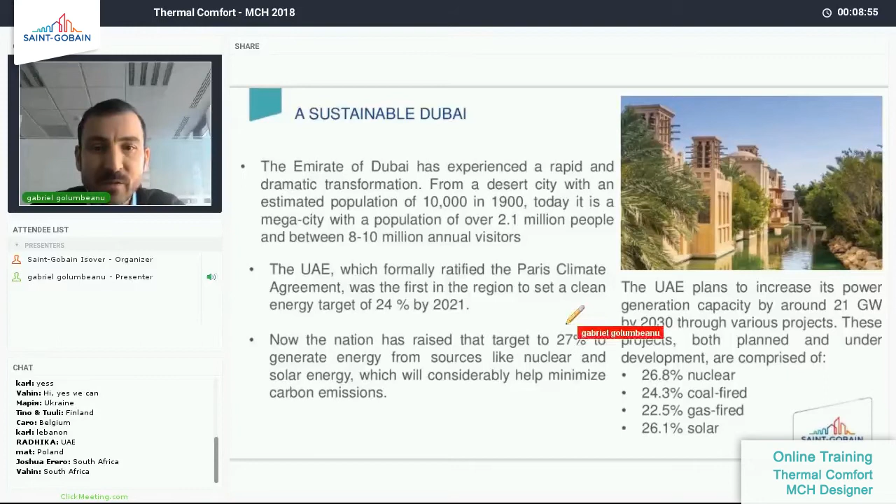But just to know, first of all, that Dubai has ratified the Paris Climate agreement, which set an energy target of about 24% by 2021, and they even went one step further, saying we should be about 27% clean energy, in order to decrease the CO2 carbon emissions.

You can see here they are taking into account not only solar energy but also nuclear, and by 2030 the idea would be to have something like 1/4 of energy produced by nuclear, 1/4 coal, 1/4 gas, and 1/4 solar. This is one idea of how Dubai is looking at sustainability from a resources point of view today.

Then some information about energy efficiency. Dubai municipality is in the loop - it is within the council dealing with all kinds of projects around energy and water, and their aim is to reduce water consumption by as much as 40% by 2030.

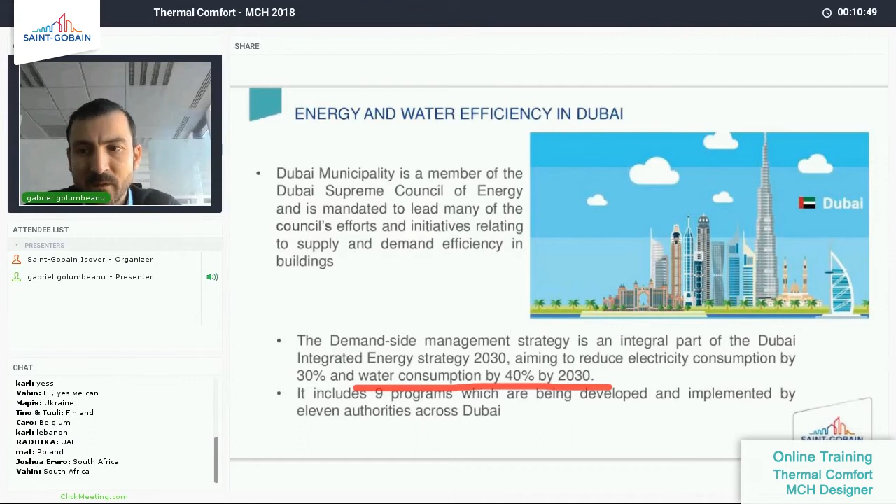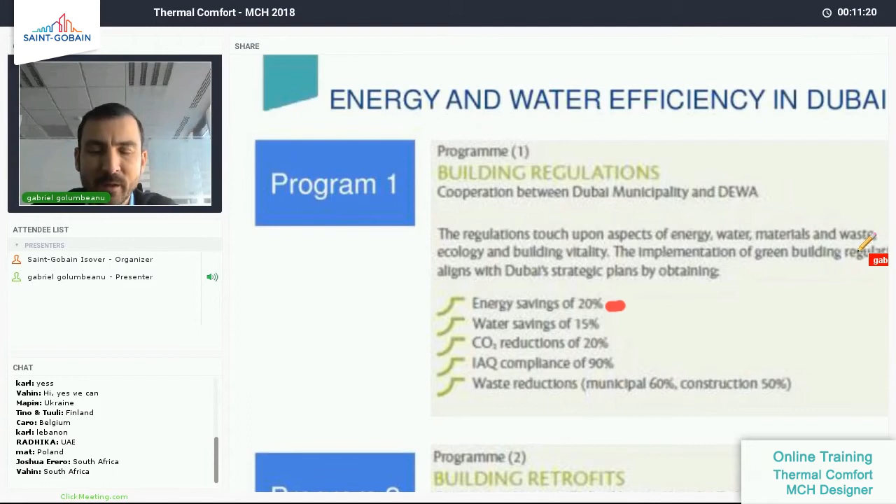As you can see, there are about 9 programs today working in Dubai. You have here an idea about the programs - I will just zoom this one to give you an idea. For example, the first program has energy savings of 20%, covering water, CO2, indoor air quality compliance, waste reduction, and so on.

Then there is a program for retrofitting. These programs give you an idea about how today, locally, the issue of sustainability is seen by the local authorities.

Then you will also see this green building regulation and specification. The green building approach has been regulated in Dubai since 2011, so there is a document on that one. I will share it with you briefly, and then you will find it on the website of the student contest, so that you can download it.

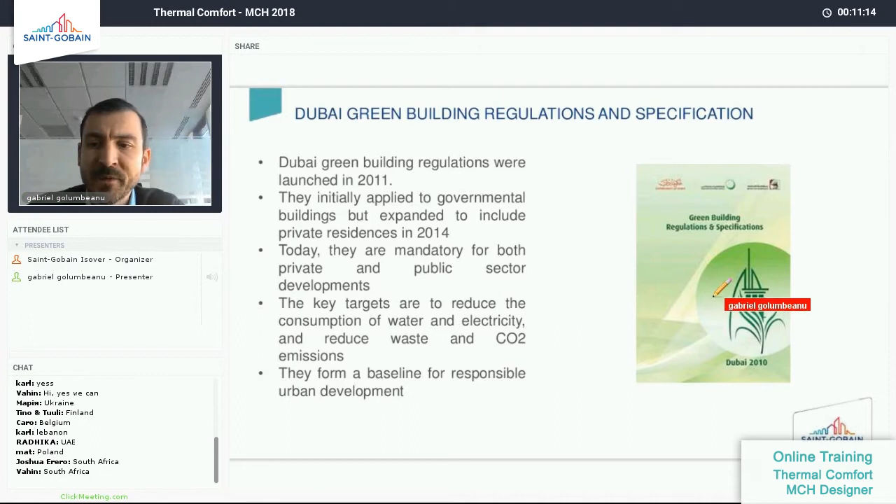And last but not least, there is a rating system which was launched back in 2016. You have platinum, gold, silver, and bronze, and the point is that if you do not receive this minimum bronze rating, you will not receive the permission from Dubai municipality.

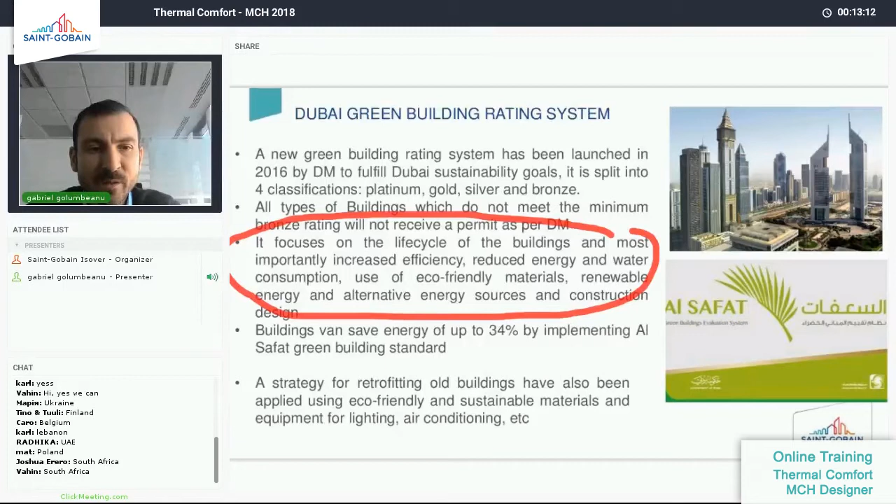So I encourage you to take a look at it. It is focusing on the life cycle of the building - about increasing energy efficiency, increasing the efficiency of using energy, increasing the efficiency of using water. There are a lot of key statements there that I encourage you to take a look at.

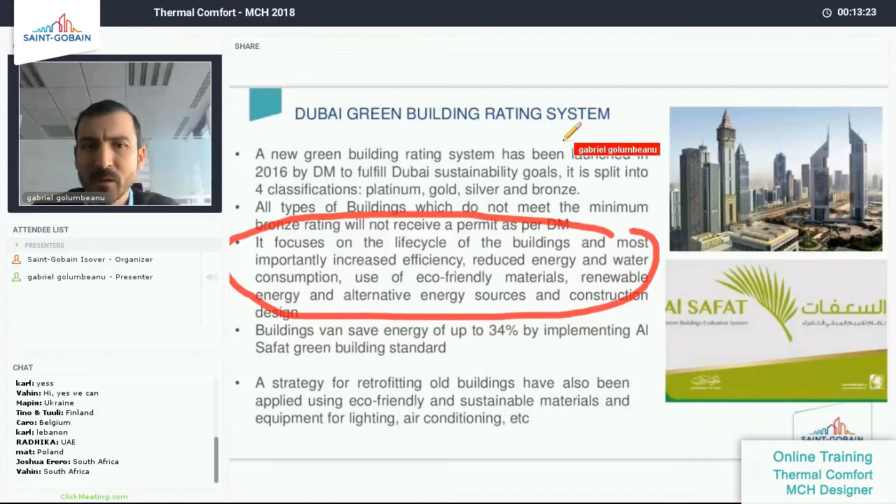So to give you an idea of how this is looking, I'll just close this one and open this one very briefly again. So you have here a document which is basically showing you the definitions, what it's linked with the planning, and what is the link with the different dimensions of comfort that you can find here.

Then you have a few other sections - efficiency of resources when we speak about energy, efficiency of resources when we speak about water, and last but not least, material and waste. So within your project, make sure that you look at it and have some comments around it.

For those of you that already heard it during the previous presentation, I will repeat myself; for those that don't know it yet - don't assume, neither for the local stage nor the international stage, that the judges will know everything there is to know about your project if you do not explain it, if you do not show it, if you don't put it somewhere.

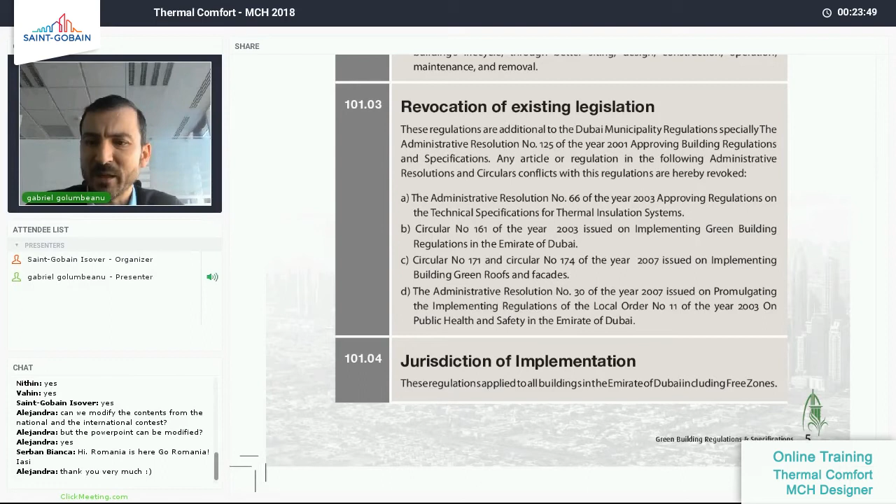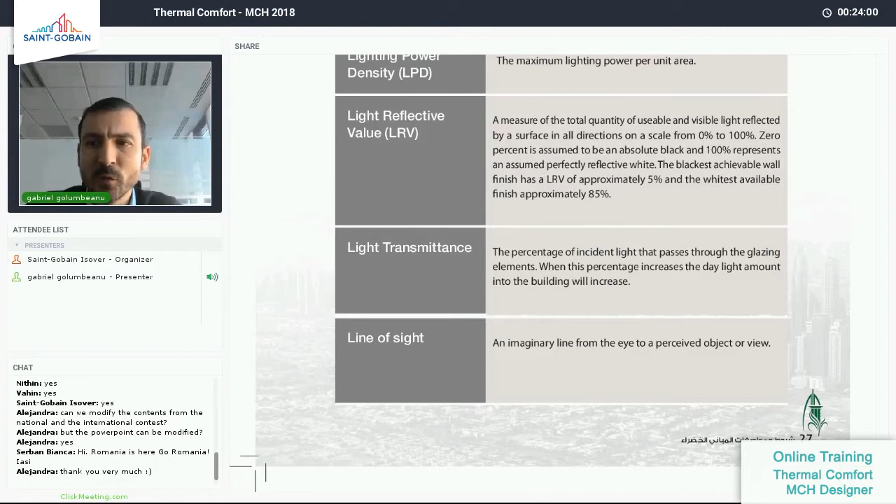Going a little further with this, I'm not going to go too much into details, but you can see here, it's 77 pages of all kinds of data and information that is good to take a look at.

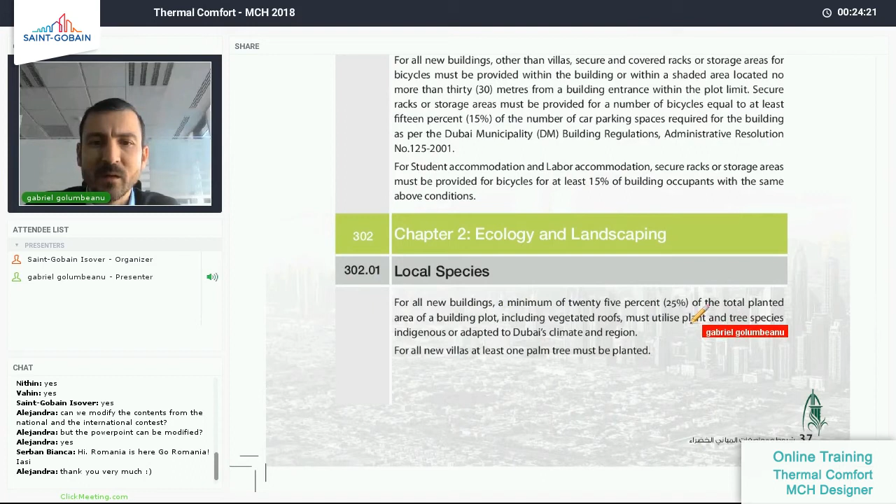I'll try to go deeper within the presentation. This should be the part with the planning. For example, for new buildings, a minimum of 25% of the total planted area of the building plot, including vegetal roof, must utilize plants and tree species indigenous or adapted to Dubai climate and region. This is actually a common sense rule. You're not going to take species which are not adapted to Dubai, take them from Europe, plant them in Dubai, and say this plant needs constant 24/7 monitoring and water supply. It doesn't have to even be mentioned, but it is, because you have to adapt to local legislation.

Then you have a lot of things about light and colors. For example, for all new buildings, at least 75% of the area of external painted walls must have a minimum light reflective value of 45%. Basically it's saying you need your building painted in light colors. If you come to Dubai with a building and paint it black, one of the first questions the judges will ask is how about the overheating effect due to color?

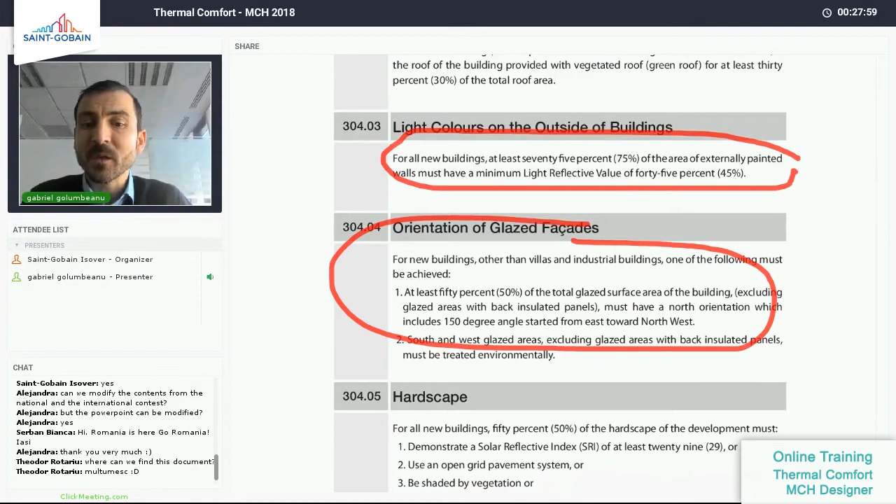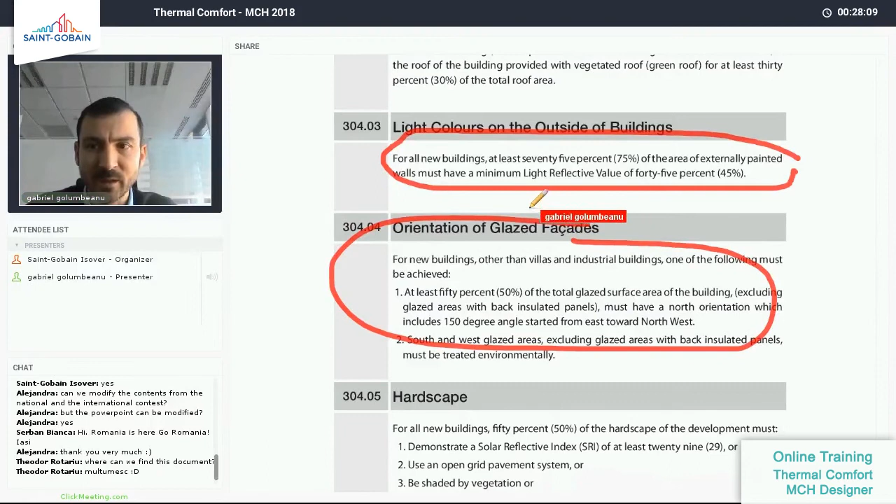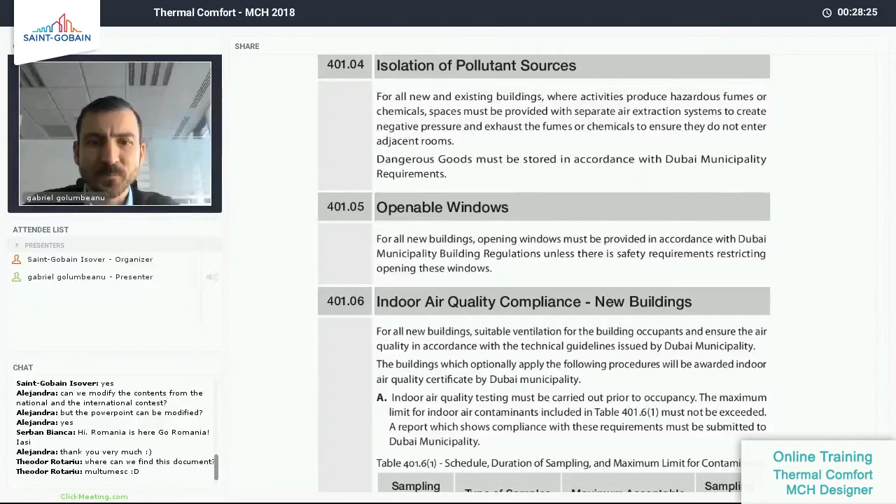Nothing special, but just maybe in a more point-by-point approach. This will be uploaded on the website. The training is finished, and if you are going to respect the multi-comfort criteria, then these criteria of green building will also be achieved.

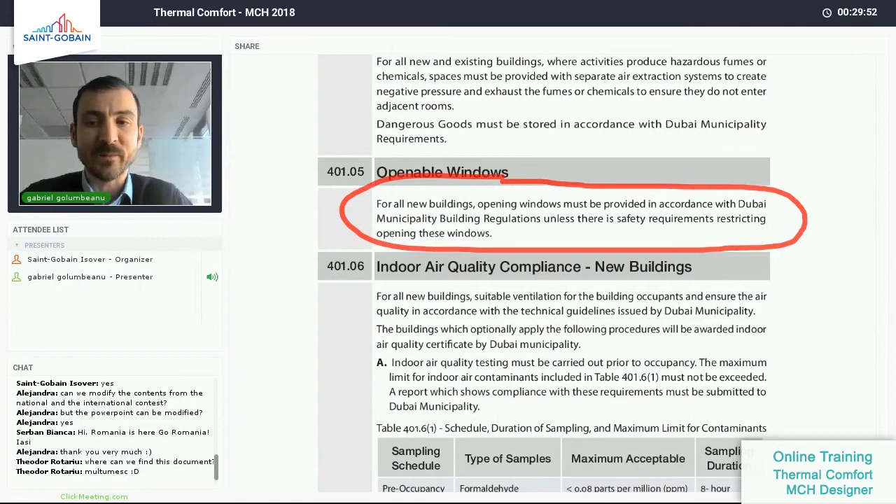Another example: openable windows. This is in connection with air quality. If you provide and show that you are actively providing fresh air, then it's already okay. But if you provide openable windows and say ventilation is going to be done only through openable windows, then the judges will ask what you are going to do during periods when the outside temperature is above 35 degrees. You have to select: either I breathe, so I open the window, and I get 35 degrees inside, or I choose not to breathe just to stay cool. So you need to think about these two and take them into account.

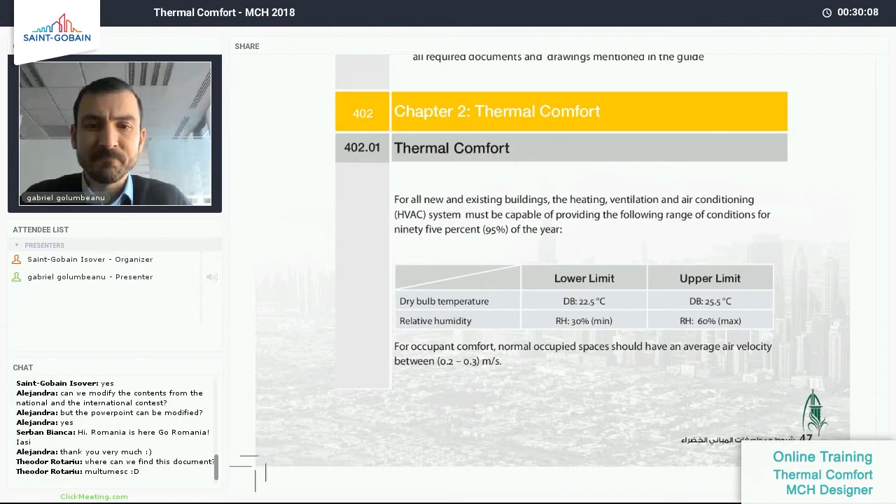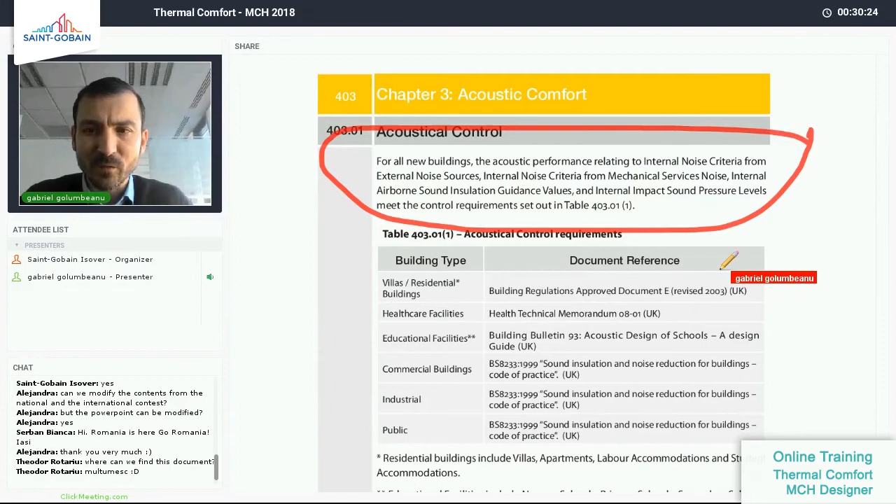I think that would be more or less within the limit. I don't know what more I could tell you about this. We already have a full presentation on acoustics that you have to fulfill with the multi-comfort criteria. You should feel that it's not going to be an issue to reach the levels we are speaking about.

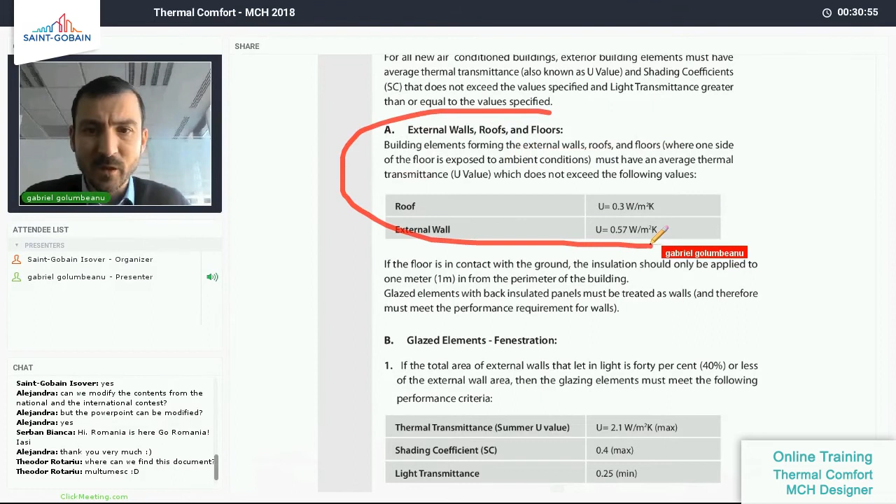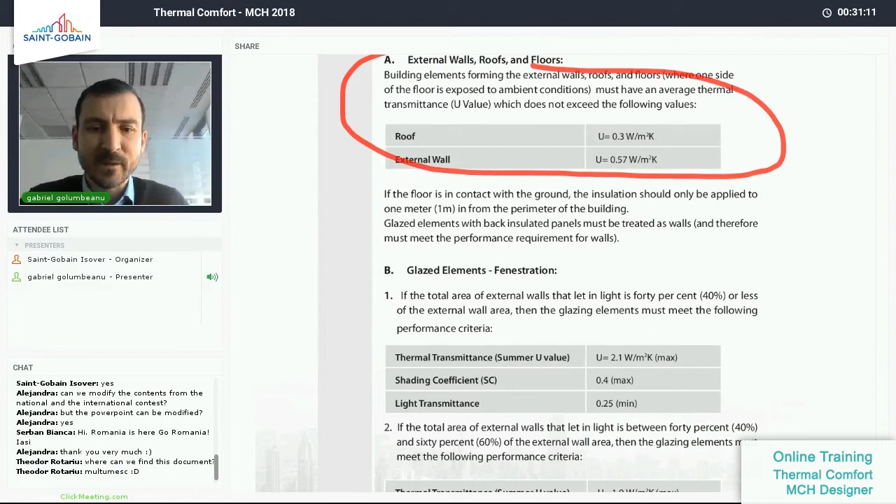So have a look at it and you will understand it better. Just to show you, because I mentioned that if you respect the multi-comfort principles and approach, you will already be better than what is asked here. You can see the roof requirement is 0.3; our recommendation is to go at 0.15, so better. The external walls requirement is 0.6; we recommend you go far below that. All of these things will be respected by you if you approach it within the multi-comfort view.

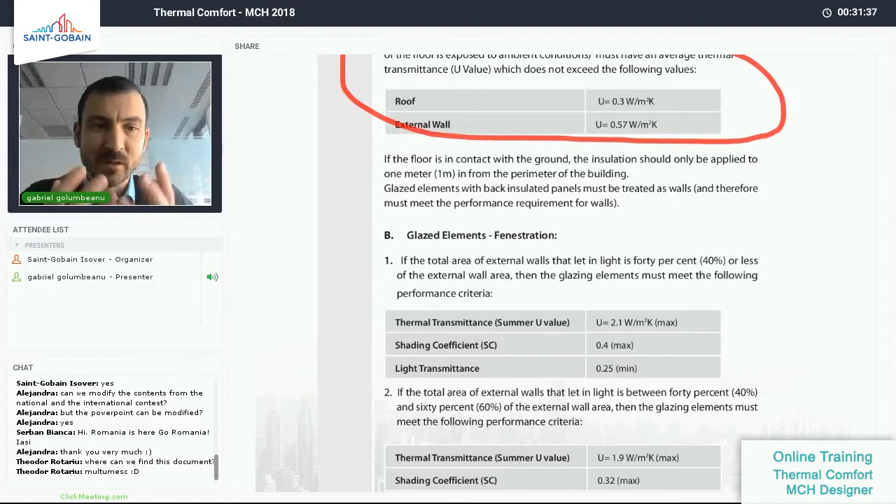And then, of course, taking a more global look at sustainability, when we speak about social environment, the building as an intrinsic part of the development. Any questions on this one?

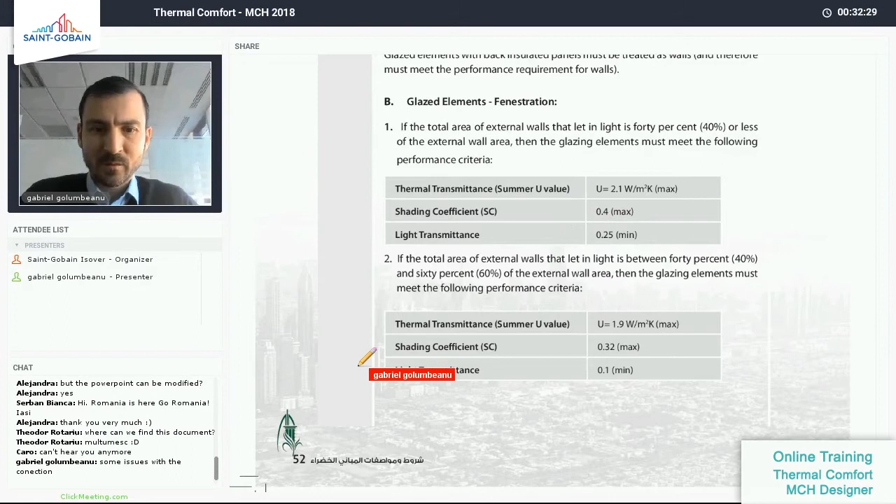Okay, so any questions on what we already discussed? No more questions on these issues. Everything is okay, clear. Good.

Then I would like to share with you also briefly the calculation procedure, or let's say approach. I'm pretty sure you must have seen by now that within the task of this year there are several ways in which you are allowed to realize your calculations. Any of you have already started doing some simulation, some calculation for your projects?

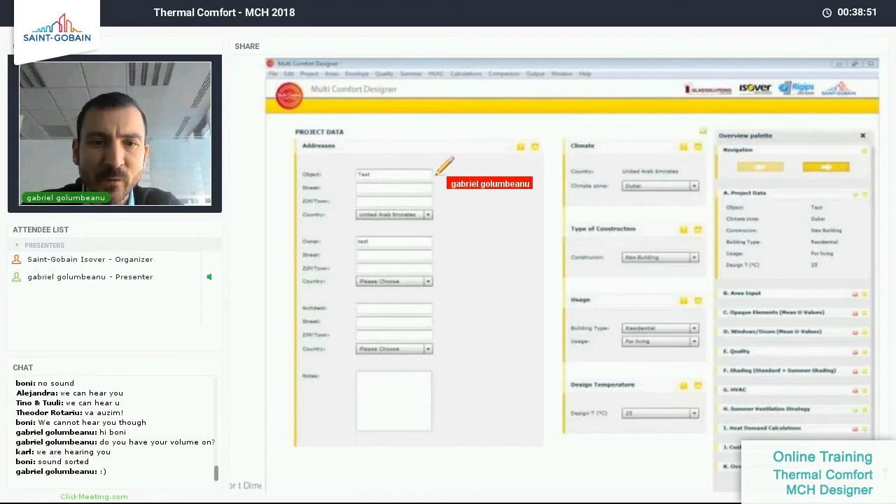So the first thing you need to do within the Designer is, first of all, let's make it red, is to name the object and select the country. Let me check also, by the way, do you see this? Can you read what is in here, or you cannot?

I think I am on lower parameters in terms of transfer, so I don't. Okay, perfect. So first you need to put a name, and you need to select a country. The selection of the country here will trigger the selection you are having in the climate section. In this case it is very simple - you are selecting United Arab Emirates. Of course you can select any of the other countries if you want to do a test by yourself.

Then you select Dubai. And then you have here some very simple, straightforward things like new construction, residential, of course for living. And then you have a design temperature, which is here - I have selected 25.

Once you have done this, you will see that there is here such a thing as the green button. All the others, this one, this one, this one, this one, they are all red. The moment that you managed to put all the information required for that segment to work, this little button here will turn itself green.

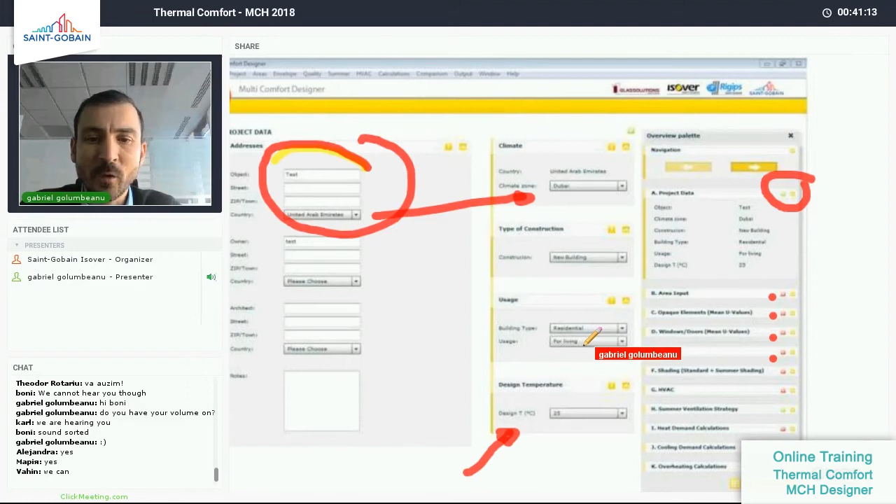project, you can go back and forward from this one. You can also do the same thing basically from here, because here you have all the functions you are going with the support of the navigation. You have the area, the envelope, the quality, summer, HVAC, and so on. If you have any questions, please stop me or write it to me and I'll try to answer to the best of my abilities. This part, I think it is clear, okay?

Then you have the area input. Depending on how deep you go on the area input, you can get more accurate or less accurate results.

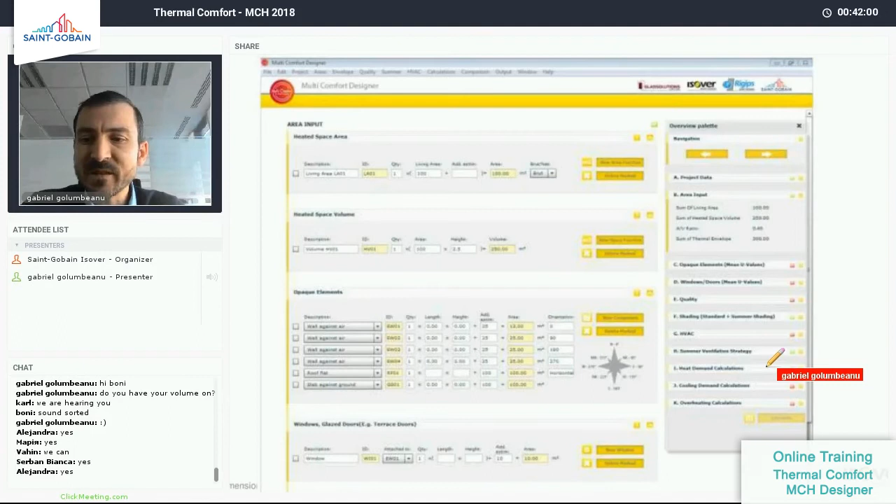The first part you will come across is to define the heated space area. You can define it as a single entity, just one, and say it's about 100 square meters. Or if it's more complex, you can define it by room, making one heated area, second heated area, third heated area, and they will be recognized as such in the software.

Furthermore, for each heated area you will define a heated space volume, and you will have as many heated volumes as you have heated areas. For each volume you will be requested to put the height. You can take into account an average height, or go further and define it for each space if you have 5 different heights or whatever.

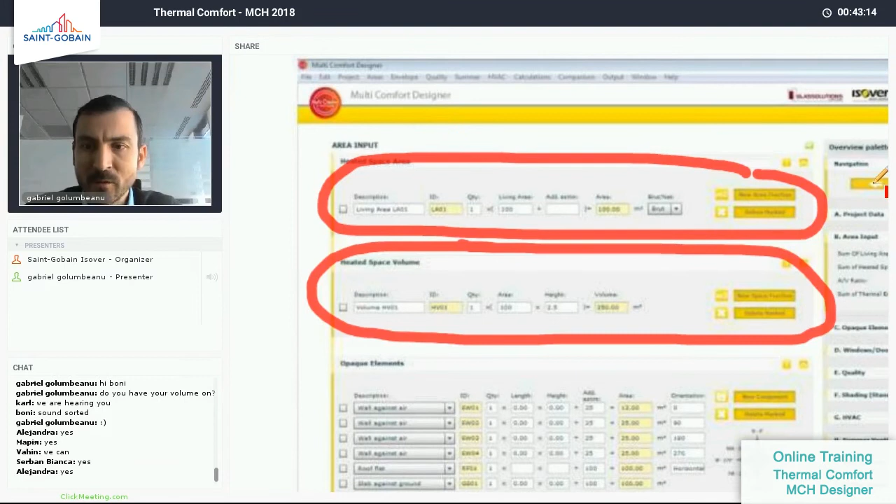Next is where you get to define your opaque elements. Your opaque elements are defined here by a set of 4 walls, a roof if you wish, and a floor. But you can add as many walls as you want.

Or if you decide to have an octagon-like building, or section, looking at the plan, if it's an octagon, then I can define 8 walls. If you make it round, I can make it with 20 walls to get as close as possible to a circle. Or I can approximate it a bit more.

Let's assume I'm going to have some kind of building which looks slightly like this. This is the plan, here is the north. Now I have a few options: either I do 1, 2, 3, 4, 5, 6 walls.

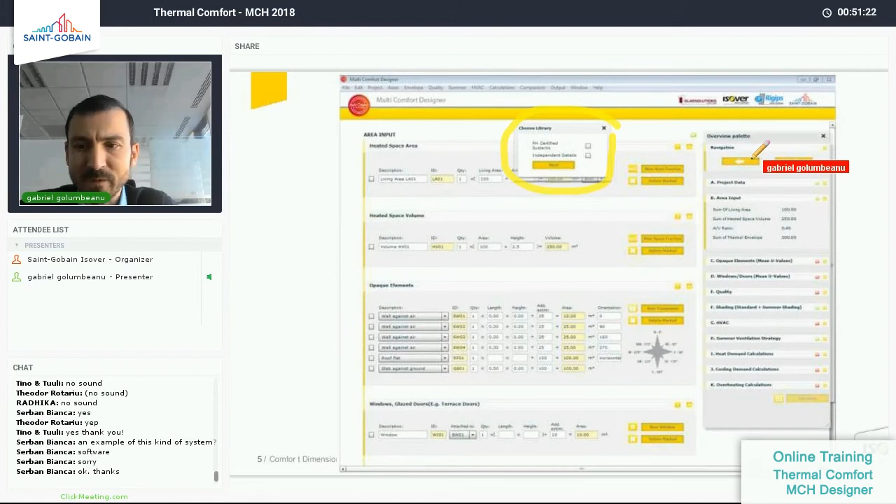So I have selected for this explanation the independent one, just to give you some examples. The moment that you have selected this independent details, then you have different options. First option is to select a certain typology of construction. It can be massive, it can be timber, and then you have here the various options linked to what you have defined in the envelope.

Well, Vahin, this is up to you to find out. They were certified for continental Europe, and some of them will meet, some of them might be too much, and some of them might not be enough. So this is up to you to define and to analyze how to look at it.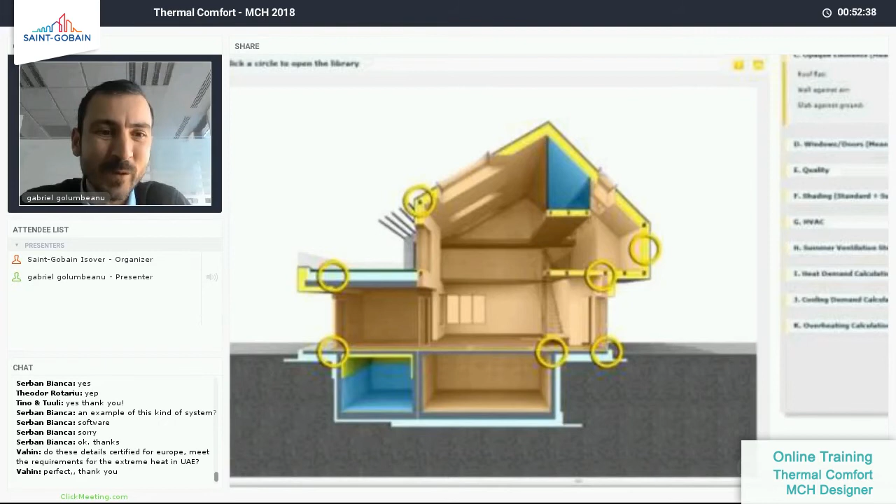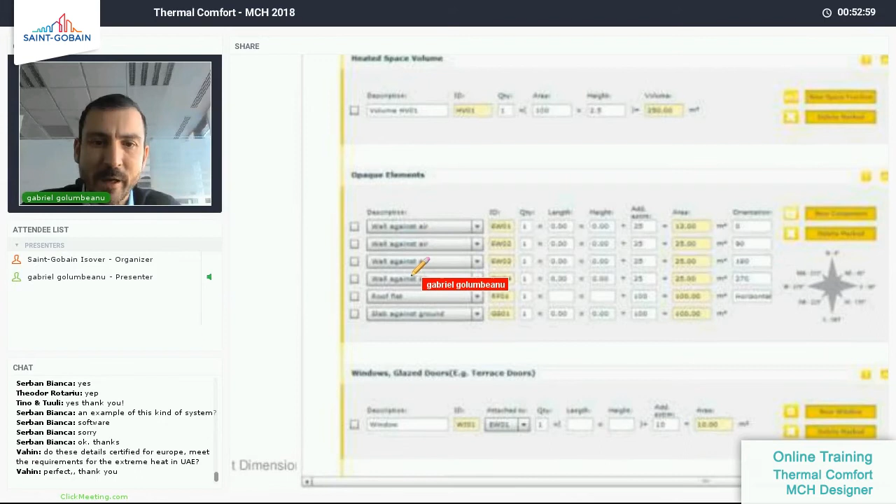Welcome. So here the options will be linked to the options that you have pre-selected in your thermal envelope. If you have wall against air here, then you select the wall against air, and if you click on it, you enter to the selection of the wall against air. If you have flat roof, you click on the flat roof, and in this case we are going to this page, which is the page for the flat roof.

The page for the flat roof consists of several pieces of information. First of all, you are having the section where the construction detail is explained. You can see the layers by section and so on. The second one is a library. So if you click on next, you scroll - it's not a scroll, it's more clicking and going from left to right. You have several possibilities or several options of details that you can choose from.

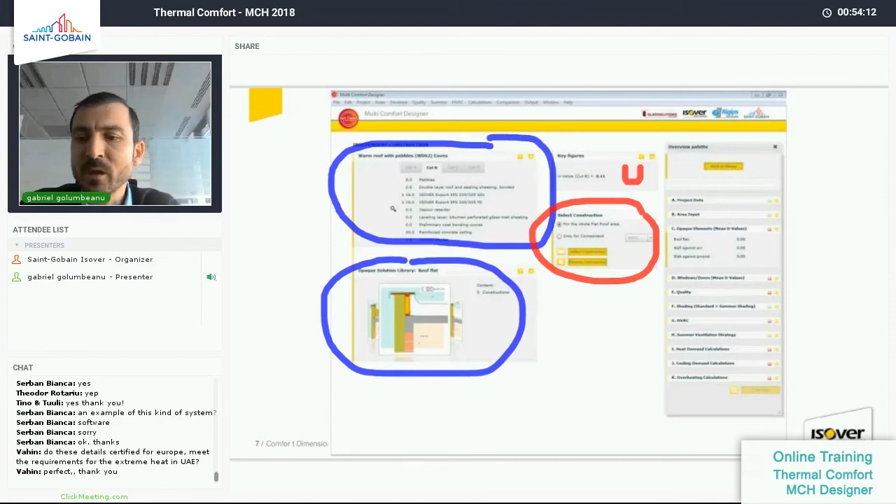Here you have the U value, and here you have a selection option which will give you the following information. First of all, it will tell you, do you want to select this construction as a flat roof or only for a part?

So going back to the way that you have developed your envelope, if within your envelope you said, okay, I want to be very precise, and from my 200 square meters of flat roof, I have 100 square meters done with one detail, and the other 100 square meters with another detail, then you define two flat roofs. You just click on add a new construction and define it as a flat roof, and you can say I have two sections of flat roof, one of 100 square meters and another one of 100 square meters.

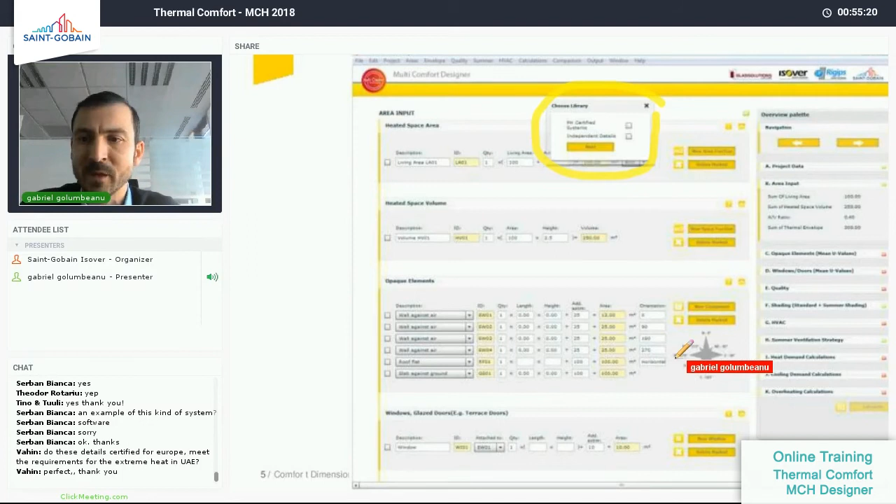Then when you are going to reach the part where you select the detail, you can say I want to select it only for flat roof section 1 or for flat roof section 2. If you didn't make any differentiation, or you want to select the same detail for all the flat roof independently of where they are, then you just say okay for all of it, and then you just click select.

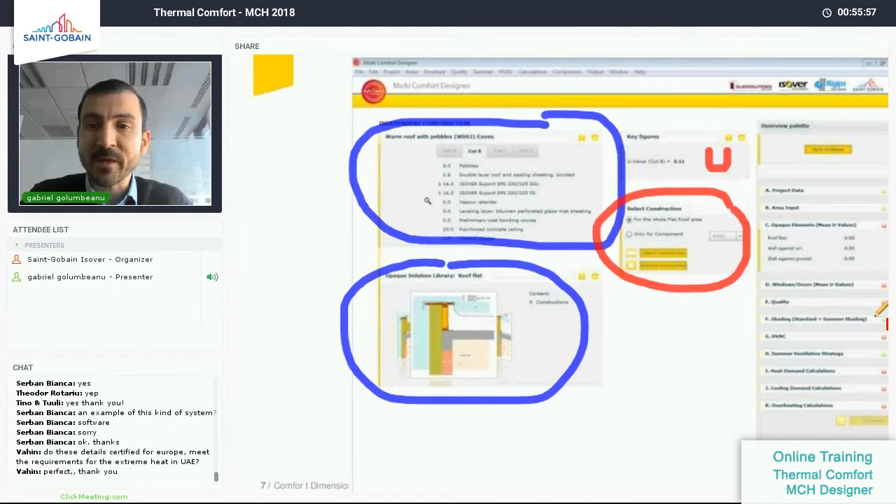The moment that you click select, then again you will see the U value appearing here in this status section, which will indicate what is the thermal performance of the construction that you have selected. Any questions?

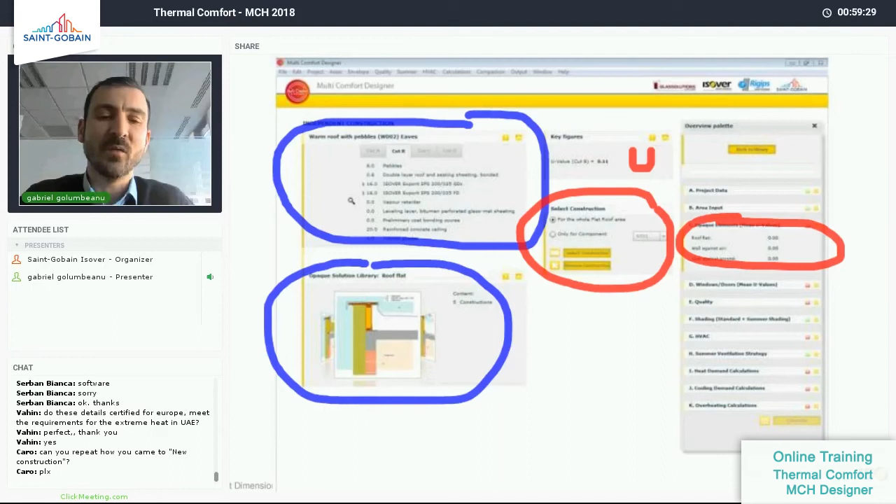How do we get to new construction? Very simple. You see here it's a library. If you click on this one to go through the different possibilities of construction typology, the last one you will encounter is this one. You can see here already the others. When you reach this one, you click on it, and you can define it if you want.

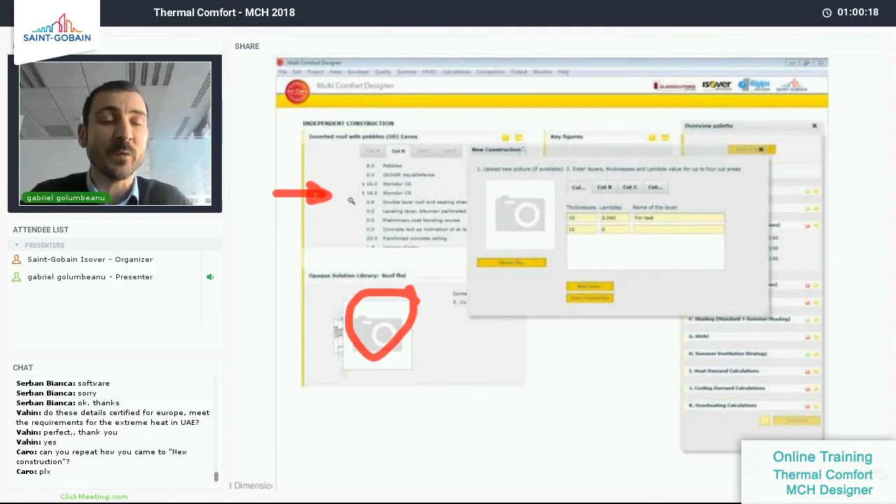Either you define it by layers, or by one layer fully comprising the elements, where you do not define them, you just put an average lambda conductivity of the wall so that you have the final U value. It is up to you. It gives you total freedom, and you can even select one picture of your detail. Then you save it and you will have this detail available for you. So if you really want to go into designing your own details, you can do that also.

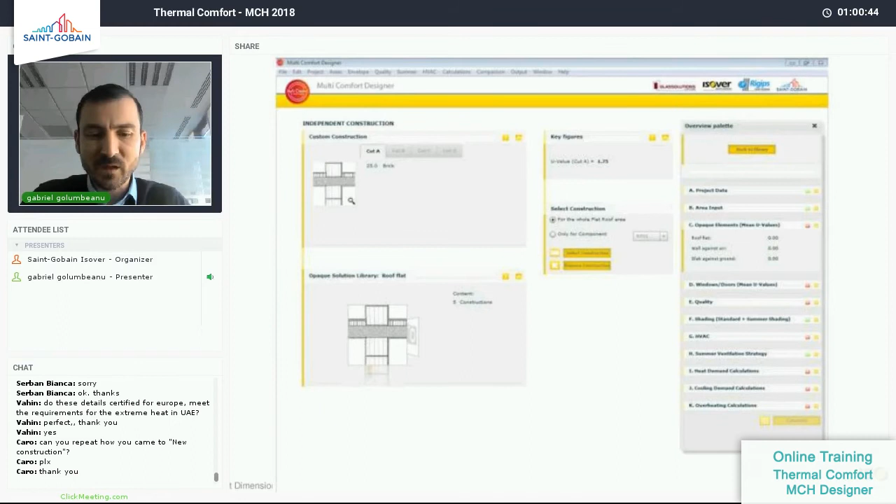So you can see, for example, this is a detail that I just implemented for us to see. It's a very simple detail, saying this is a construction detail of a wall of 25 centimeter brick, which gives me a U value accordingly. And this is the picture that I have selected for it. If you want to define it as such, it's straightforward, nothing special.

When you click and say, okay, this is the construction that I want, it will tell you that this construction has been selected. And the next thing you will notice is that in the section corresponding to your construction, you have the U value which has been attached to the flat roof section that we have identified or worked on.

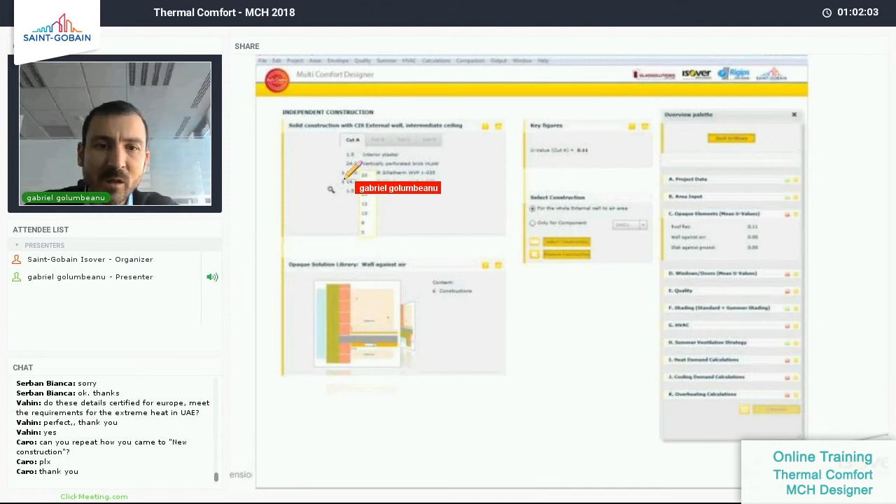And the last point I wanted to show you, as I mentioned, if you click on these arrows, you have certain possibilities of selecting different thicknesses of the insulation layer. Very straightforward, nothing extremely complicated, I would say.

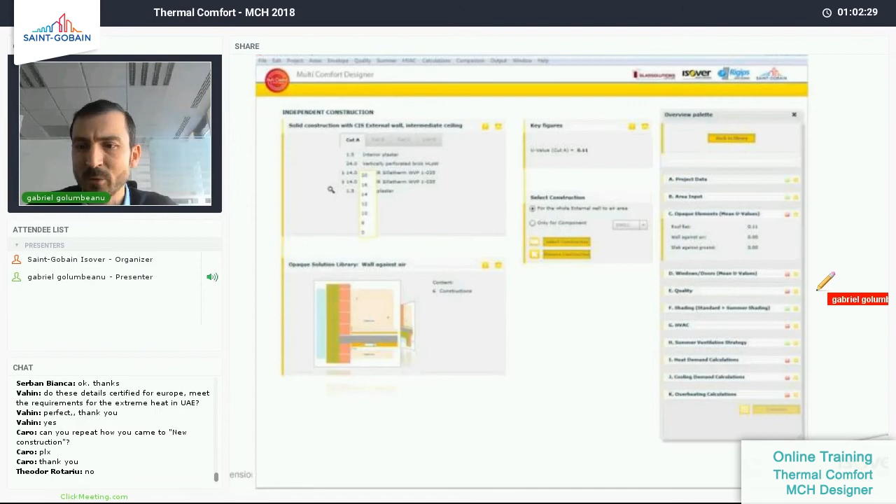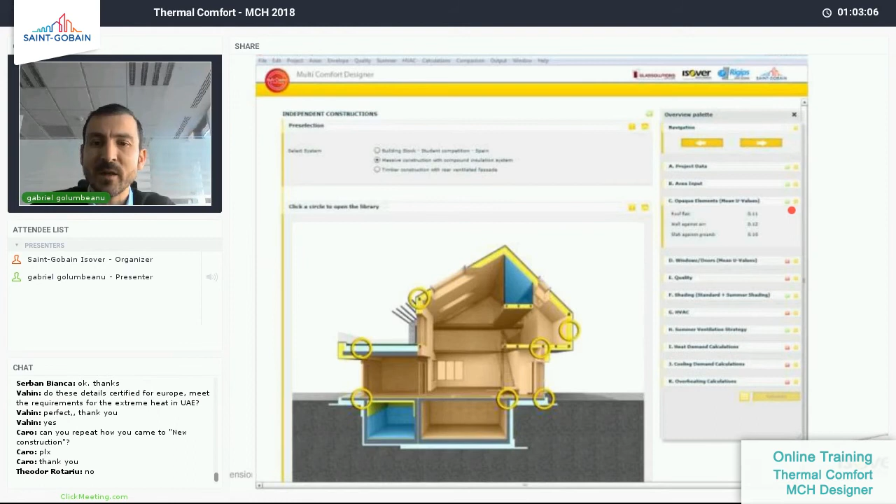Okay, good, so we move forward. Now we have already selected all the construction details for the different typologies that we have, for flat roof, for slab against ground, for exterior walls. At this moment, this little button here will turn green, and you can go further, by clicking the right arrow, entering the section dedicated to the windows. The same principles apply also for windows.

You have a library, the active construction, explained here. You have all the specification of the construction of the specific typology, and you can click on it to see different types—triple, different U values, G values, double glazing, single glazing, and so on. You select the one that you want. It will show you the U value, and also the G value. You need to think about the G value and select the right one so that you don't get too much solar heat or solar radiation inside. And last but not least, select the construction, and then the same principle applies.

You don't like these typologies of windows that we have proposed, which are more or less general. Then you can define your own glazing. You put the glazing name, the structure, the light transmittance, the U value, the G value, and so on, and you get a new construction or a new glazing structure that you can use after that.

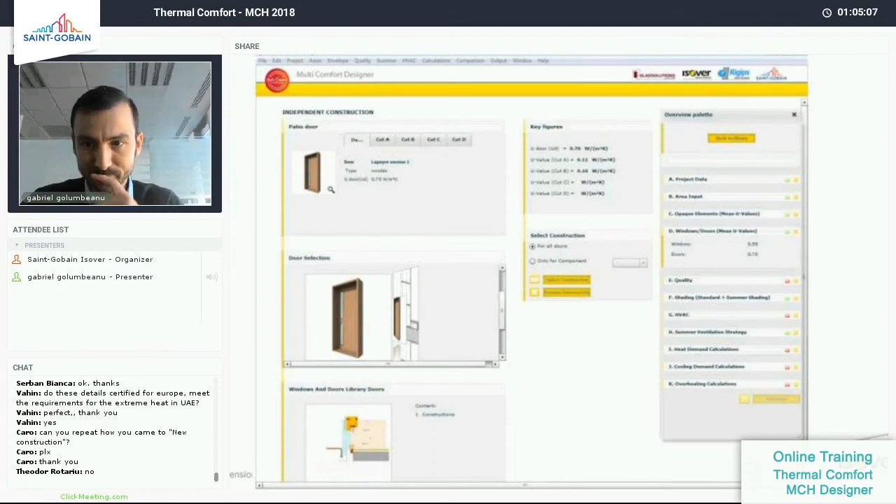I'm going to make a short comment here. I think it's more of an example. Let's assume that you have a building of this type and you decide that this area here, I do not care about it - in the sense that I'm neither going to cool it nor heat it. In Dubai, it's not the case, it's more about cooling. So if this is the case, then your envelope, the one that you treat, is basically this shape.

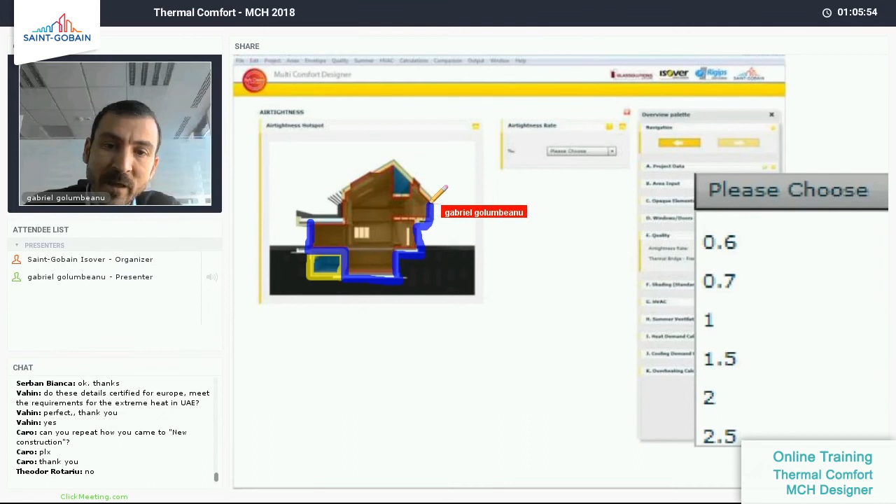You do not care about these walls, this one and this one, or this wall and slab. This is your envelope, and this is what you have to define. So if you do not treat it, then you don't take it into account. Which means that if you have a space like this, you might have, if it is a house, maybe 2 doors. If it is an office building or whatever, it can have 3, 4, 5 doors. But basically, we are speaking about the doors from the treated space, the cooled envelope.

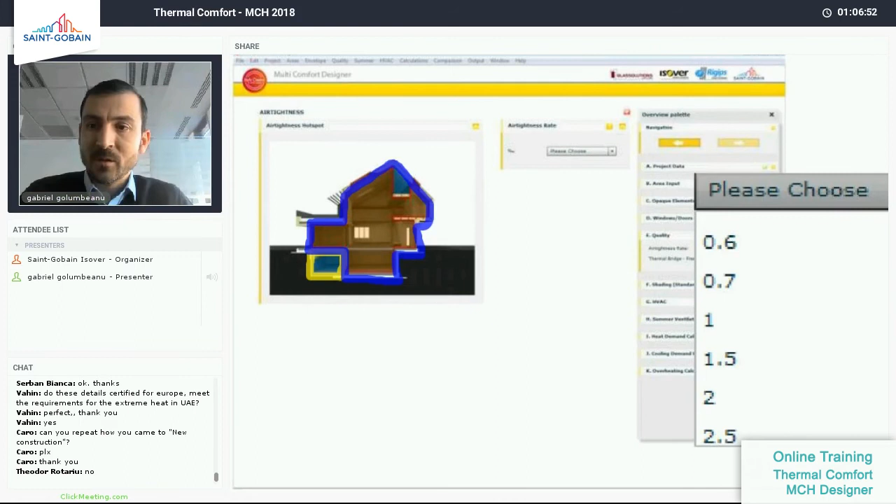So now I'm going back. You have selected a door, and then you have basically the D part of your overview palette, which is ready, which is also green. You can see it here, and you go back. Going forward, you will find the part where you can see what you have selected, what are the different construction typologies, and where you can decide to remove some of them.

For example, I have here the 4 typologies for the walls. I decide that this one, which is for wall number 1, is not good. I click on delete, and then I go back and select a new construction. I want to delete all of them - I just delete 1, 2, 3, 4, and that's it. I go back to the library and select a new construction.

And with that, basically, you have already dimensioned your building, your construction, and you have already selected the different typologies of constructions, the different details that you have for the envelope of the surface that you take into account. Any questions to this side?

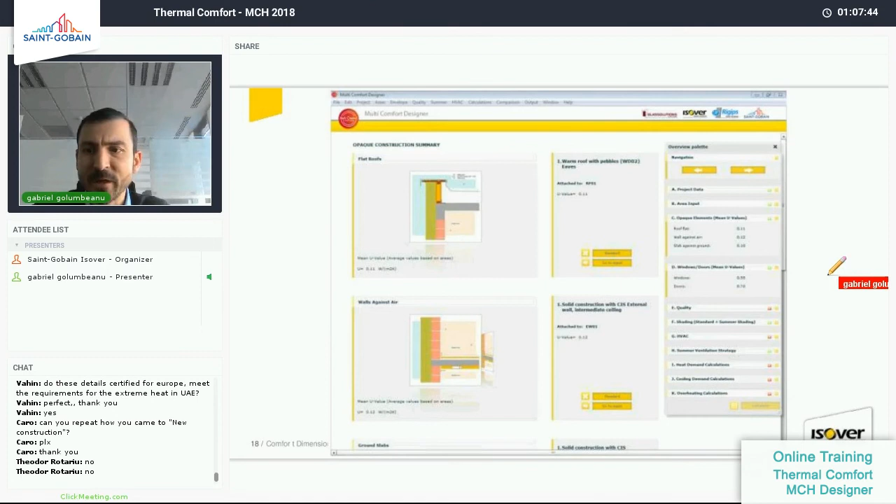Okay, good. The next options are slightly easier in terms of selection. One of the next ones is the air tightness. This will ask you to think about how airtight your building will be. Air tightness has great importance because if you build a construction which will have free exchanges between the cooled air inside and the heated air outside, this will influence the overall performance of the building. So you are asked to select one value - the higher the value, the less airtight the building; the lower the value, the more airtight the building.

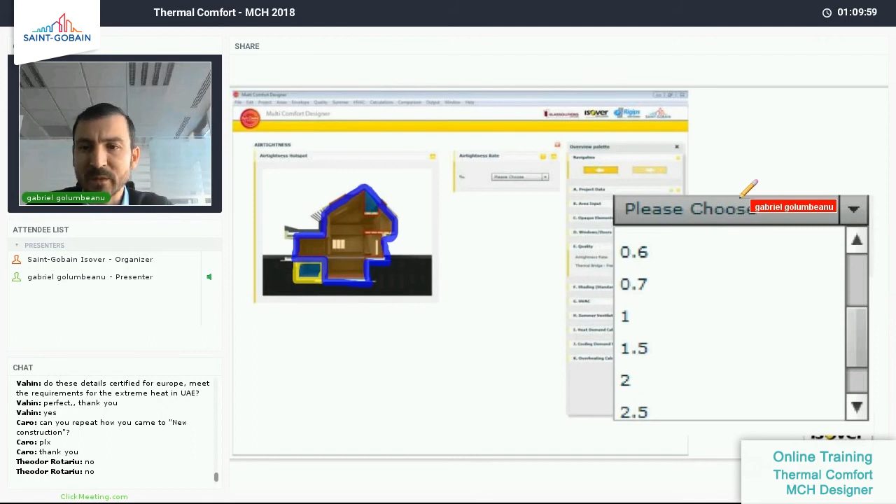You also always have a small question mark on each of these, where you can find more information that can support you with what that is and what you should do. So you can select, say, a value of 0.4. You have selected this 0.4, and it will appear in the status bar. Then you are asked, is your building thermally free from a thermal bridge point of view?

The reason we are asking you to click that is the fact that we do not calculate the thermal bridges. It is virtually impossible to calculate it for that many countries and that many constructions. This calculation has different rules in different countries, so we decided not to calculate it. Instead, when you do the analysis of the building, you already know that it is a little bit over-evaluated, in the sense that the consumption you will get in reality will be higher, sometimes 20 or maybe 25% higher, because of these thermal bridges.

So the thermal bridges are not calculated, and this is for you to know and keep in mind, that within a real project there are local specifications on how to calculate them, and this specification you or somebody dealing with this has to analyze, because in some cases it can be a very high percentage of the total result of the building.

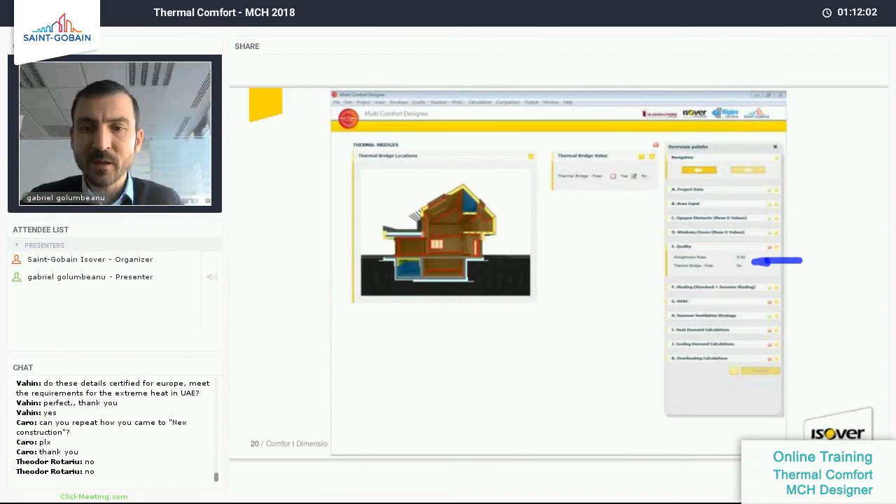So the moment you click on yes, this part will be ready, and we move to the next section, which is the shading section.

The shading section is the first part. It deals with so-called shading generated by the space or by the building itself—shading from the design, if you wish.

There is one option which will put an average shading, and that's it—all the surfaces will be shaded with this average shading. But if you feel this is not respecting your design, you can select and design shading specifically, with different typologies for each of the envelope elements you have defined.

For example, if I select the walls oriented towards south, I can say I have shading coming from a neighboring building, which is this tall, and the distance between the middle of that building and my windows is this. You could do this for each window, but that is no longer the case.

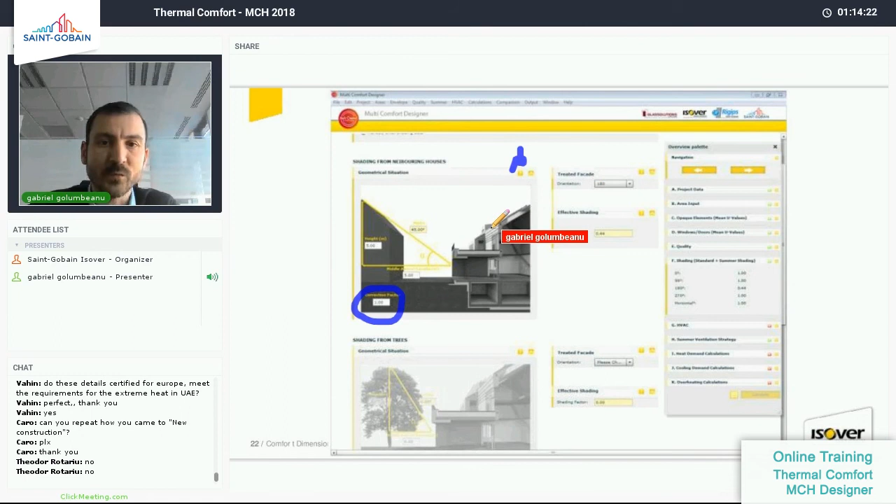It would be far too complicated, so to go faster you can define it for each facade window, and then say the thing in front of me will affect only 50% or 20% of the windows on this part of the envelope. You correct it here in the correction factors, and there is also an explanation on how to do this here.

Furthermore, you also have window shading from trees and so on. So if you want to go deep, you can go far deeper than in the beginning.

The next option is summer shading. Here we treat shadings which are not necessarily from the design, in the sense that they can also be added afterward—such as sunshades—or they are not coming from the geometry of the building or from its emplacement.

So you can have different types of sunshades: fixed outside, inside, sun louvers, and so on. You can also define this and add it to the shading.

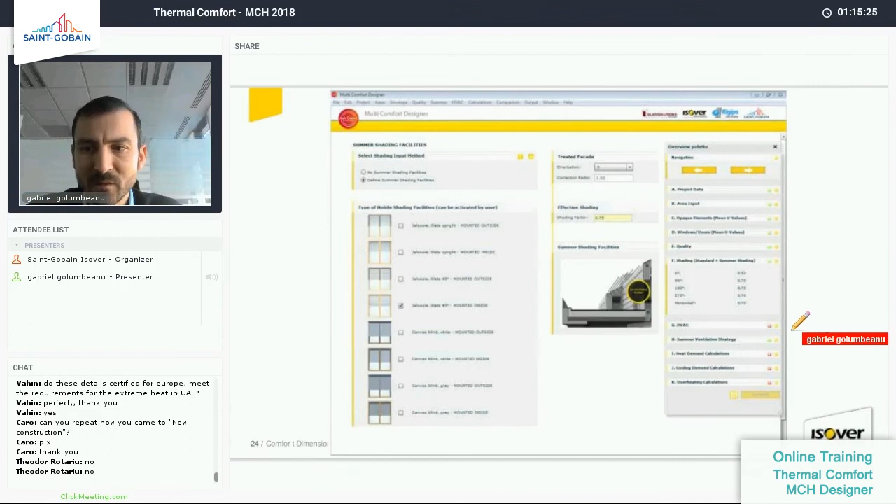With this, you are ready to move to the next section, which is HVAC. Here again you have more or less the same principle, different typologies, so if you don't want an HVAC system, you just select no, and that's it.

If not, you can select an HVAC system with heat recuperation of a different value, and a subsoil heat exchanger if you want, then you just click on calculate and you get your results.

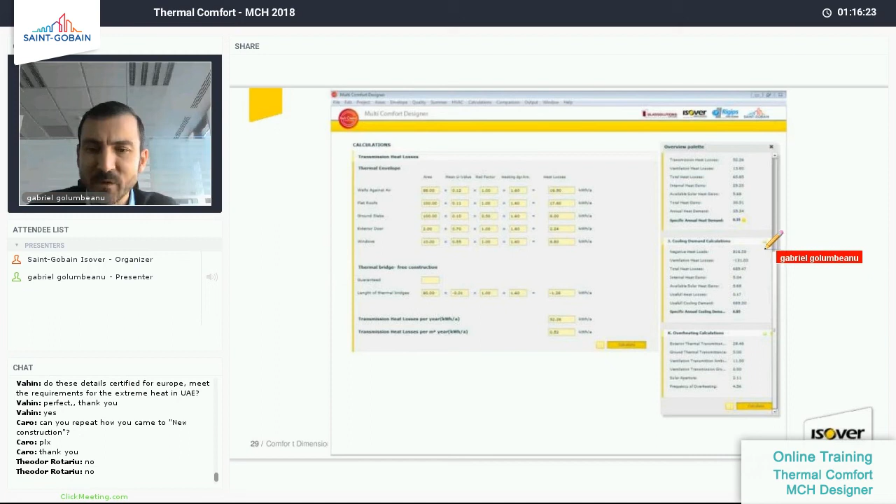That's it. The results you can get are shown here: the space heating demand, the cooling demand, and the overall results. For example, you have the overheating calculation, where you can set a temperature, say 26 degrees, that you would like in your construction.

In the case of this simulation, you have a certain amount of time above 26 degrees, a certain amount of time above 27, and so on. So if I accept a temperature of 27, this line will be here, and I'll see only this part.

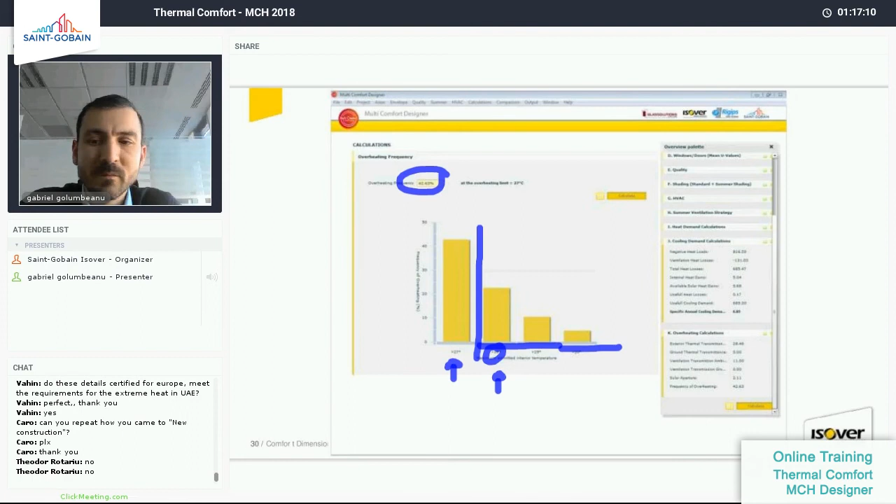Last but not least, you have the possibility of exporting a PDF report, which will basically allow you to have all this information we have been discussing, on one document.

Do you have any questions? No questions? You can still hear me, guys, yes?

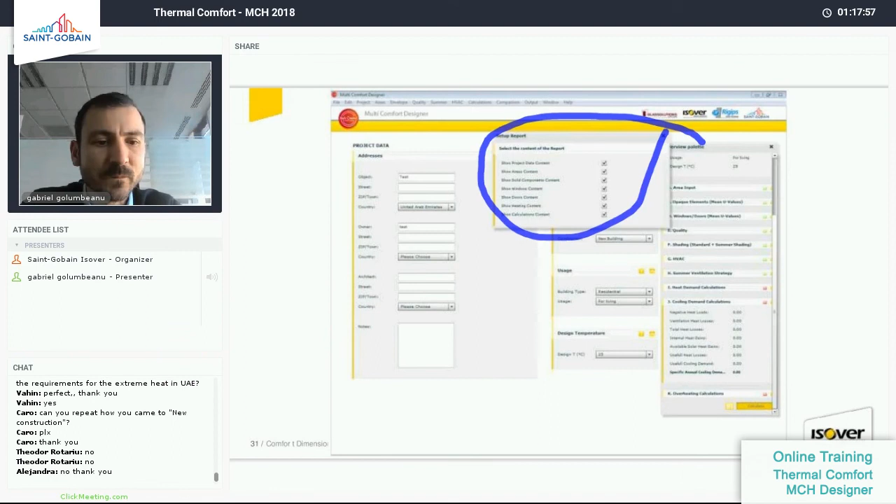Thank you, Maria. Okay, for the last 10 minutes, I would like to share with you another piece of information.

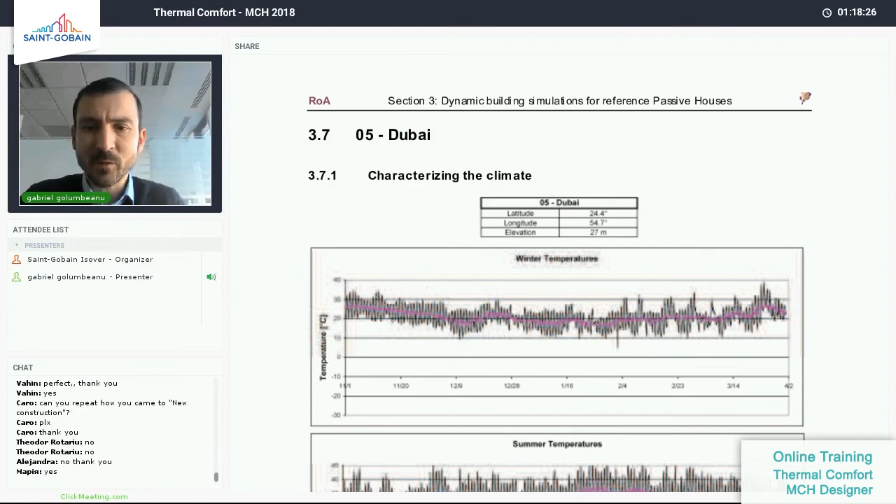So this is about Dubai and some considerations about Dubai's climate. If you look at the situation in Dubai, we know that the temperatures are opposite to what we sometimes experience in Europe. We will also upload this document.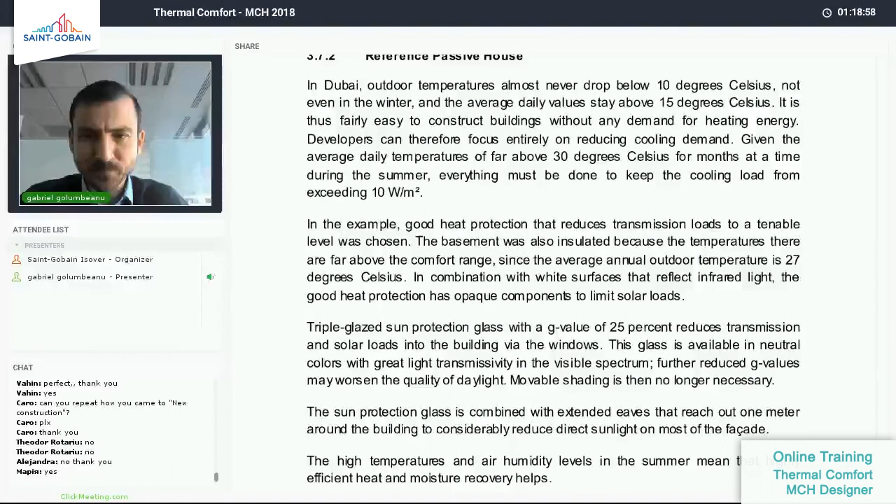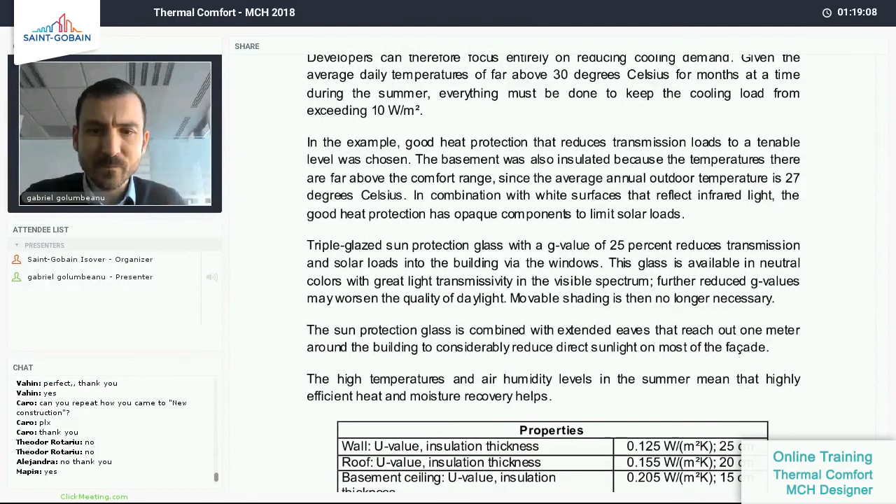There are some good practice ideas that work. For example, triple sun protective glasses with a G value of 25%.

It's a good idea. If you look at what could be recommended in terms of different characteristics, remember in the requirements from the Green Council the U value was around 0.3. We recommend to go for a U value more towards 0.12, so almost 3 times better.

As I was mentioning, if you fulfill this criteria, it's not a problem. For the roof, go for 0.15. For basement, 0.2. Do you remember the absorption coefficient of the external wall? It was about 0.35, if I remember correctly. We recommend 0.15, so we are far below.

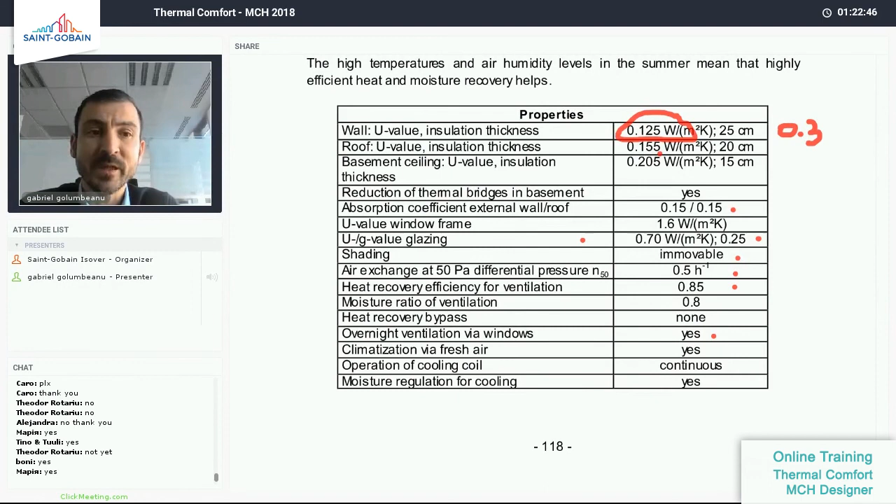If you look at it from a thermal point of view, it makes sense to have overnight ventilation via windows to get some fresh, cold air when the temperature outside is cool. But if you place your buildings close to the road, and expect people to open the window and leave it open during the night with a lot of traffic, you have to think again, because they might not be able to sleep. So although you provided for ventilation by opening windows, they cannot do it because the building is too close to the road. Noise is a far bigger problem than overheating.

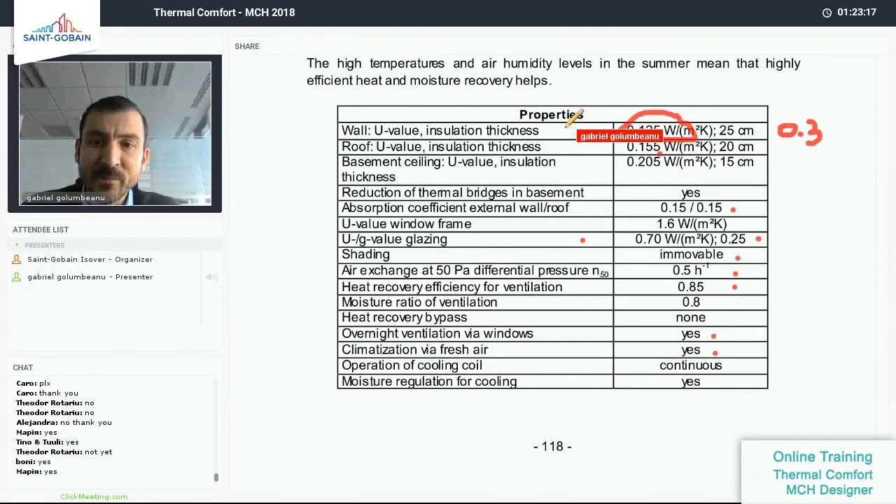Then you need to think about climatization. Of course, this is a must. These are some very short properties that you will find uploaded.

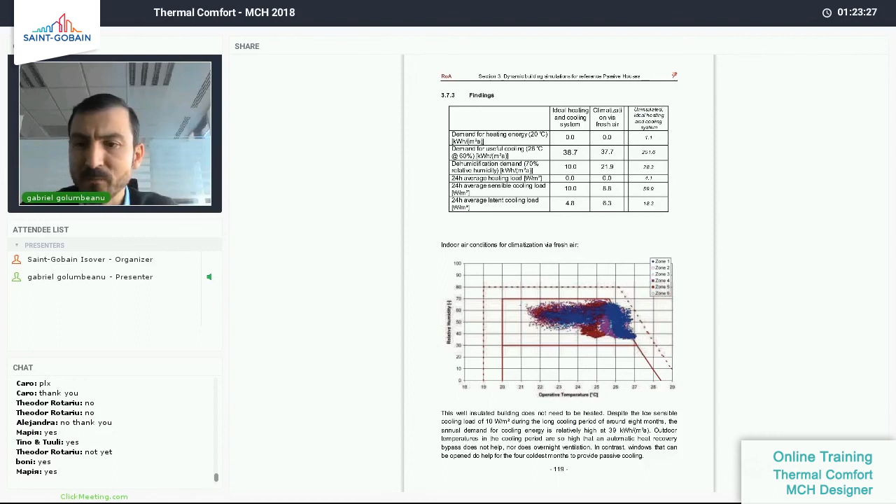So if I look at it from the point of view of what could be the result, you can see here what happens with an ideally heated and cooling system building versus a building which is uninsulated. This one is insulated, this one is uninsulated, but with the ideal heating and cooling system. The difference is 5 times bigger. This one is insulated, this one is not insulated. Now you can see the difference.

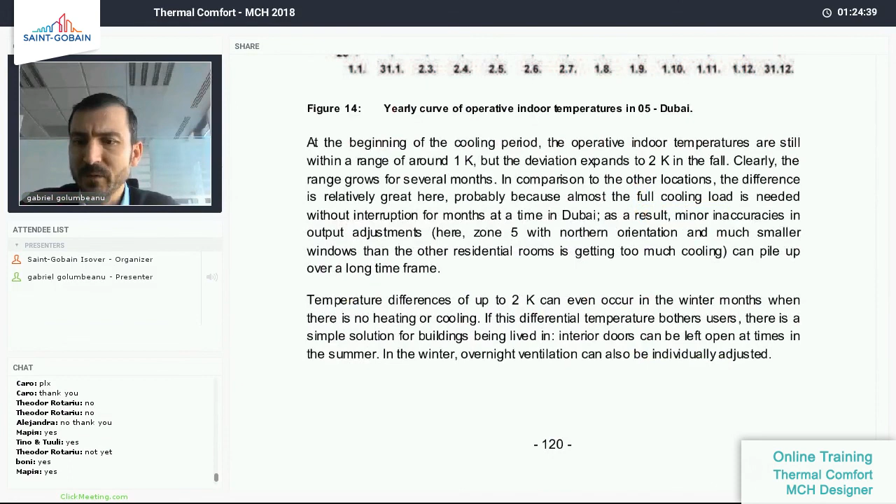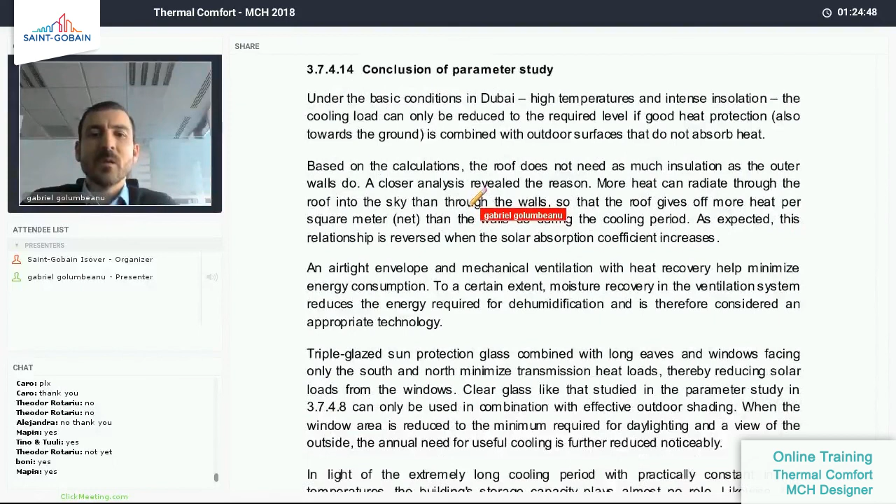I would like to show you some more information. Just give me one second. So, it is, for example...

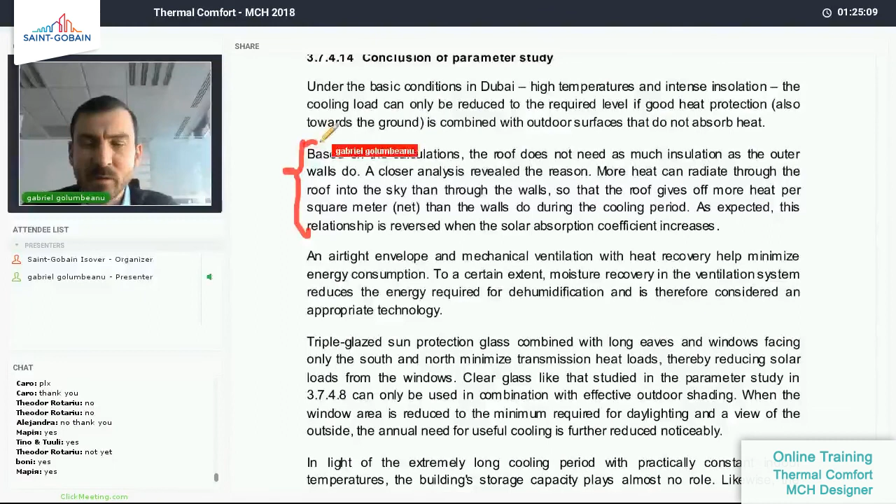The roof insulation can be lower compared to walls, but we already saw in the criteria earlier that the U value of the wall is lower than the U value of the roof. So as a conclusion, of course, they can be slightly lower.

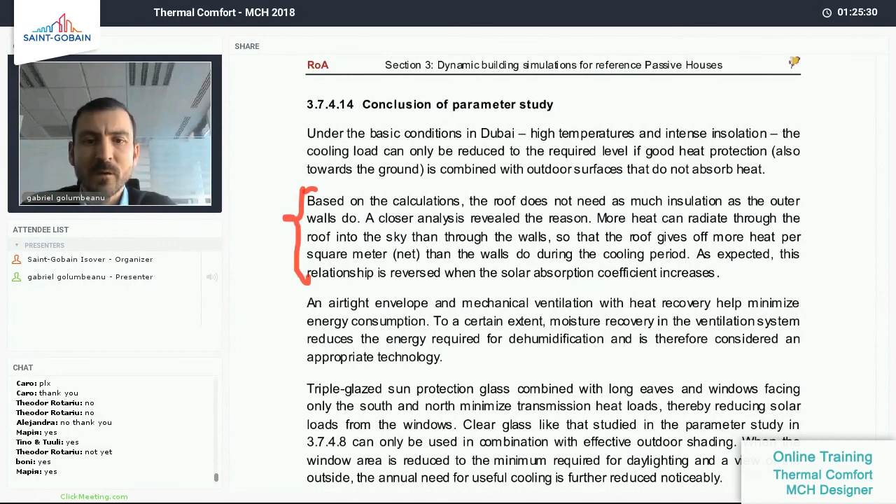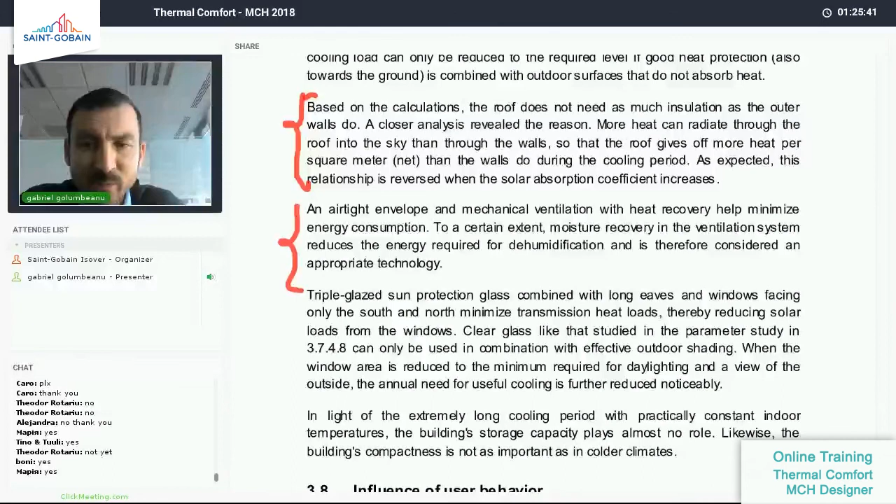An airtight envelope and mechanical ventilation with heat recovery help minimize energy consumption. Triple glazed sun protection glass with long eaves and windows facing only south and north minimize transmission.

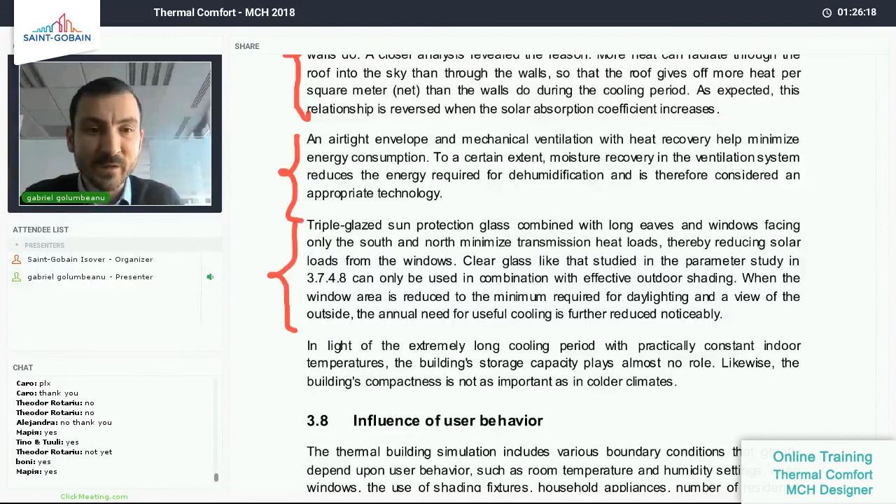In some cases you will be forced to have some windows towards east or west. You need to take that into account because your design requires this, but from a thermal point of view, they are less effective than those oriented north-south.

There is a big influence of user behavior that you have to be aware of. If the people living there leave the windows open, or forget to, it will be terribly warm inside. And there is such a thing as internal heat sources that you also need to think about.

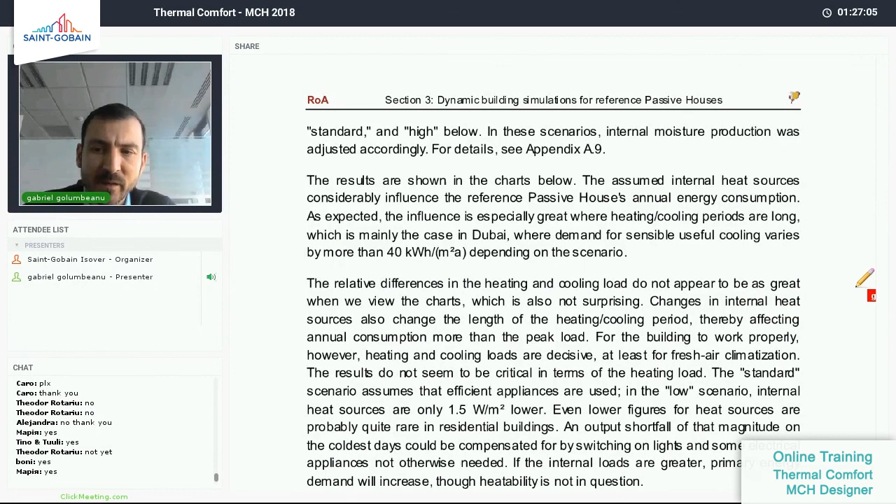I think these are the most important points that you have to take into account, and they can give you some basic directions and ideas on how to approach this and from which point of view. That would be from my side. If you have any questions, please let me know.